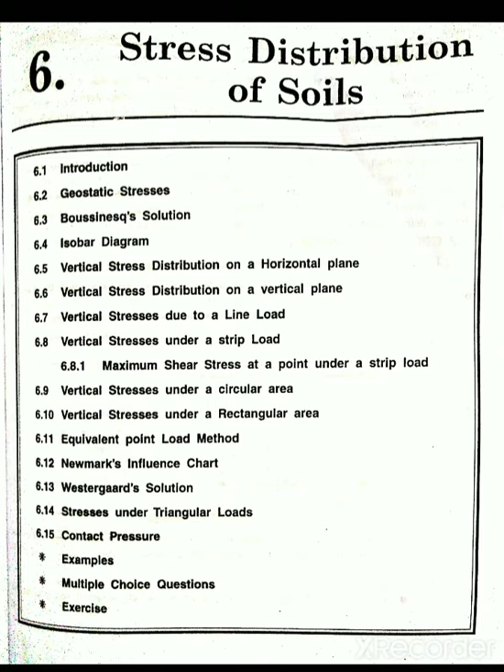Now first of all, introduction. So stresses are induced in a soil mass due to self weight of a soil and due to applied structural load. Estimation of vertical stresses at any point in a soil mass due to external vertical loading is of great significance in the prediction of settlement of buildings, bridges, embankments and many other structures. Now first of all, what is stress?

So it is elasticity of the soil, Young's modulus. You know that stress is directly proportional to strain. This is stress and this is strain. Now within the elastic limit, sigma is equal to E into e. So E is equal to stress upon strain. Within the elastic limit, it is called Hooke's law.

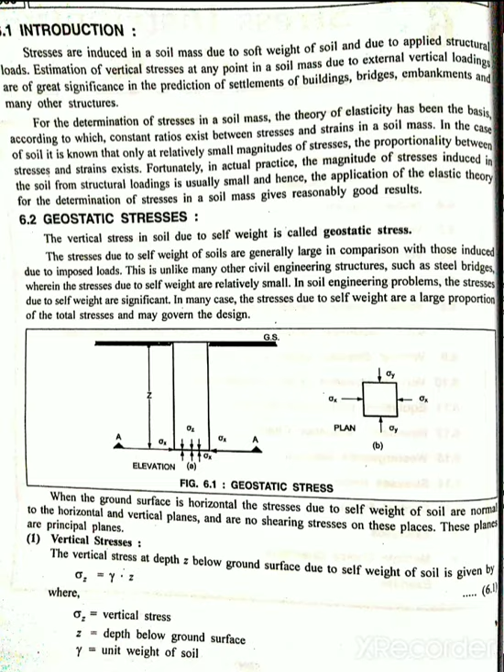Now horizontal stresses. The horizontal stresses sigma x and sigma y act on a vertical plane as shown in figure. The horizontal stress at a point in a soil mass is highly variable. This depends not only upon the vertical stress but also on the type of the soil and the condition whether the soil is stretched or compressed laterally.

So the horizontal stress is given by sigma x equal to sigma y equal to k0 into gamma into z. So it is k0 into sigma z, where k0 equal to coefficient of lateral earth pressure at rest, mu upon 1 minus mu, where mu equal to Poisson ratio.

Now at a certain point within the soil mass, the stresses are caused due to both surface loading यानी कि imposed loading as well as due to self weight of the soil above it. The stress components due to both these loadings can be found separately and then added algebraically to get the final stress at that point. Now theories regarding distribution of stresses in soil.